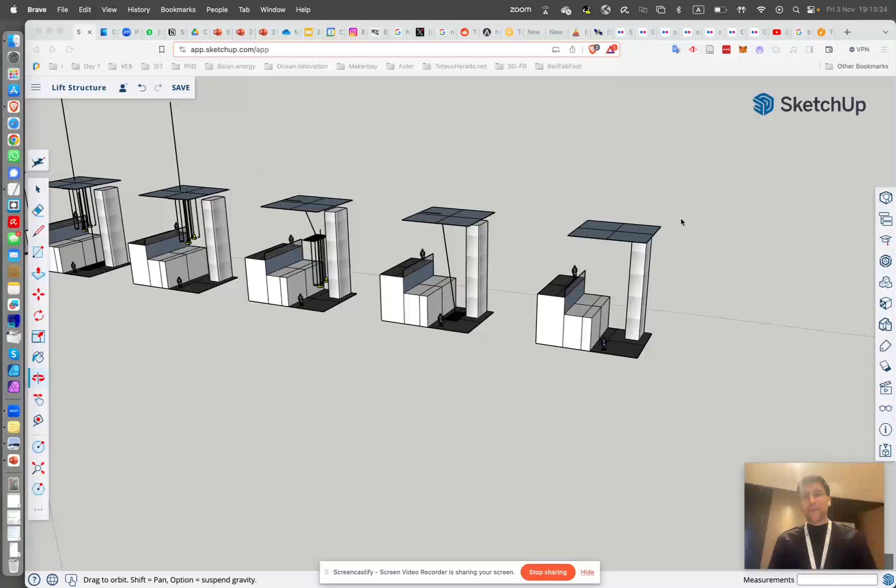Okay, so I'm making this animation to show you what I have in mind for the assembly. I hope that's clear enough what I mean. So let me sort of rotate you through the model version so you can understand what I'm talking about. Okay, so step one is nothing there, as you can see.

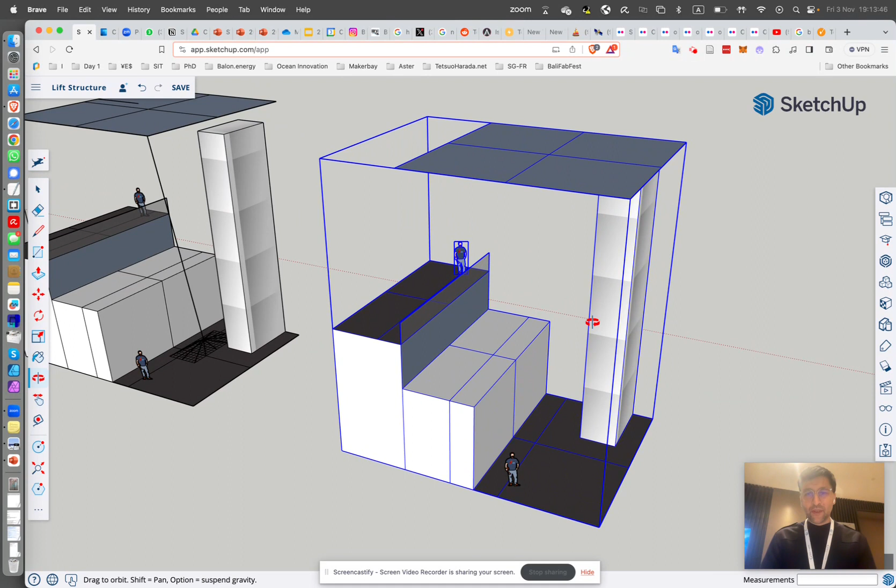So this is the place where we're looking from, and this is the elevator. It's a small gap that we have to build our frame. So I think I'm going to keep it the same. I think it's going to be good enough. So the first frame we're going to put is the frame that's going to be closest to the audience.

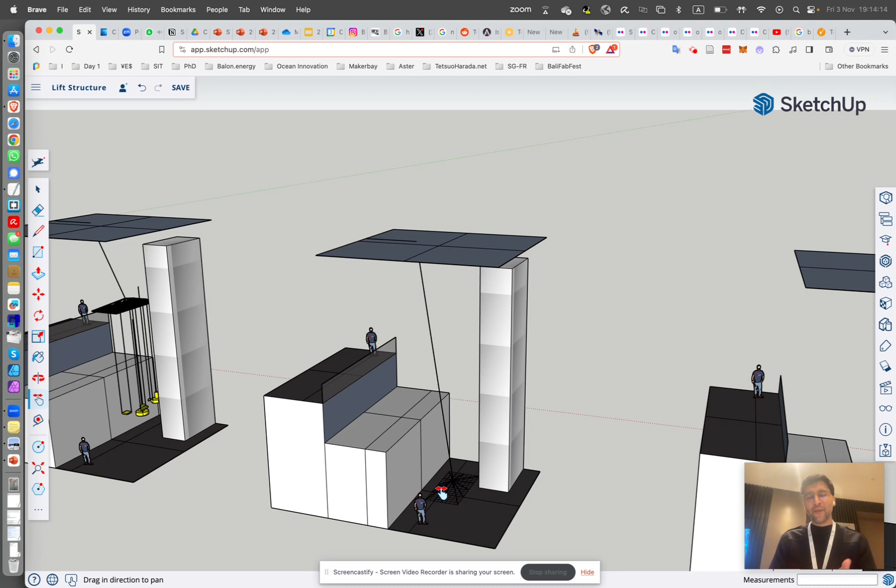So first we put the pulley at the top, an anchor point, however you want to call it, and a lift point, and then we position the frame right there. Okay, so that's the first part. Then we lift it, and then we start to attach the works. We attach the works, and then what you can do is that we lift the frame in place.

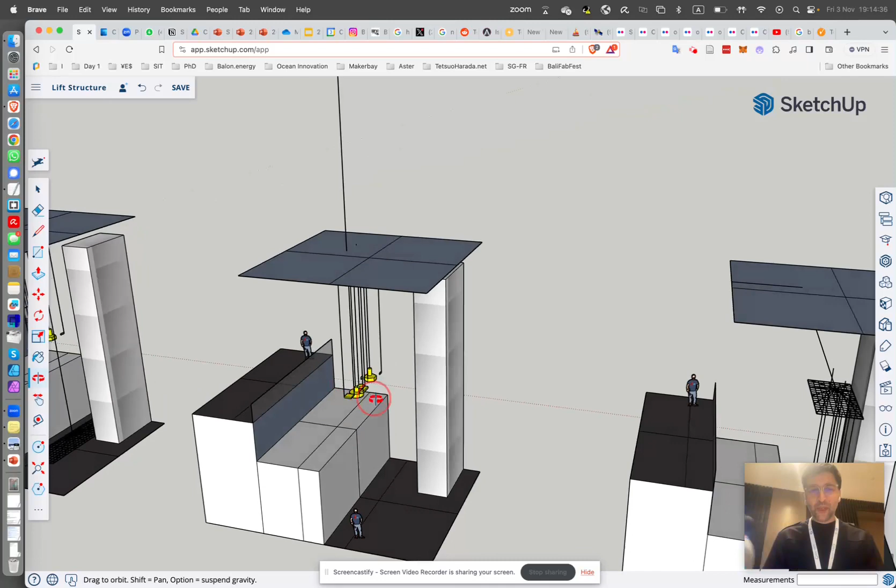So the frame is there. As you can see, the idea being that we can put it closer to the audience, and this is at the floor level. And the next step is once this one is well attached and secured, then we bring the second, 1 by 3. So this is the bigger frame.

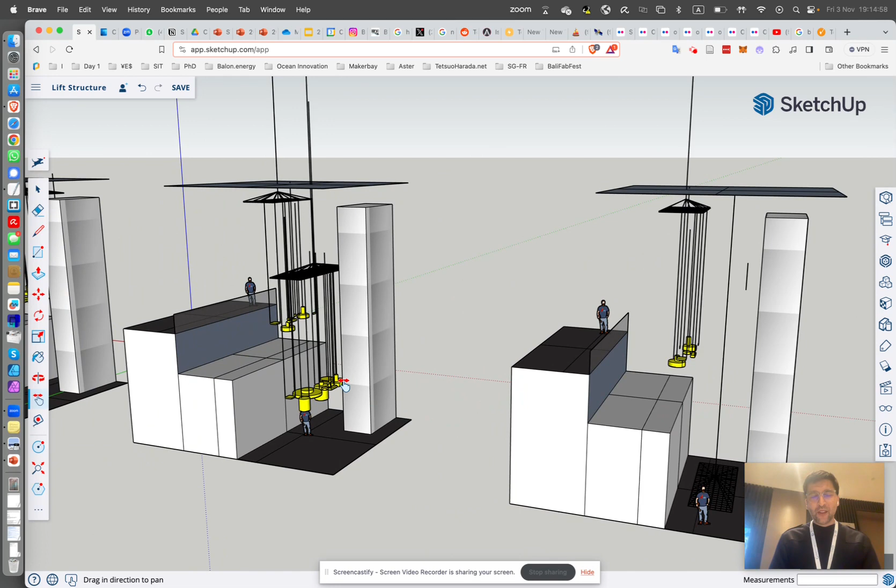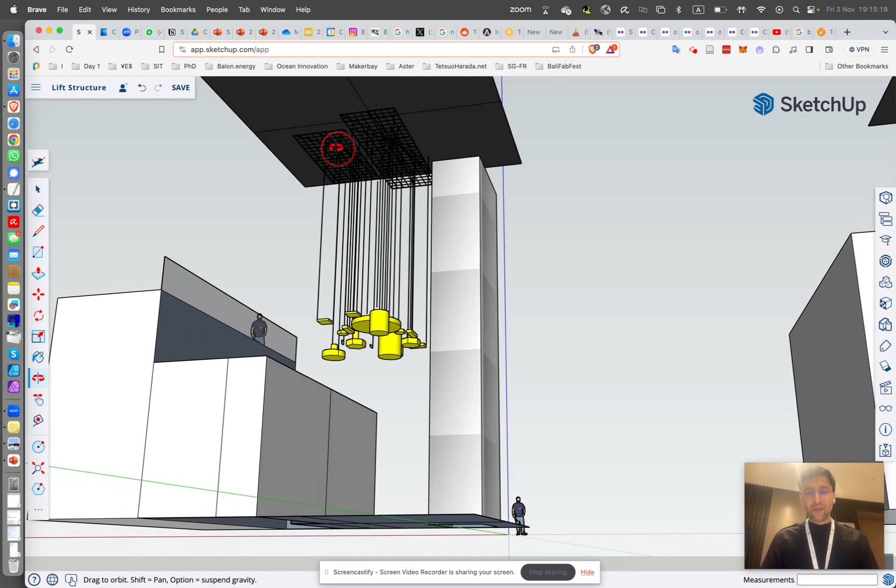We can have one frame. We can say the top here. One is 3 by 1, and the other one is 2 by 1. So that should be simple enough to manage. We can get a bigger installation and have a bit more depth. So 2 at the front, smaller, and more broad and wide at the back, 3 by 1.

Okay, so this is just an idea, but I think the advantage of this is here we only need 2 anchor points at the top of the pulley, and in my opinion, that should be quite easy. If you don't have a pulley, what we can do is that we can also sort of hang the frame higher and attach with the work, and then attach by the 4 corners if you prefer that way.

What I'm trying to argue is basically saying instead of bringing each module 1 by 1, what we could do is that we could make 2 large frames, attach all the modules, connect them to each other so they don't swing around, and we lift up the whole structure so we make sure that everything is well aligned.

Okay. I think then you guys decide, but we know that our goal is to make it easy to lift up, easy to do maintenance and modification, and if you need to do any work on the installation in the future, it should not be too much of a struggle.